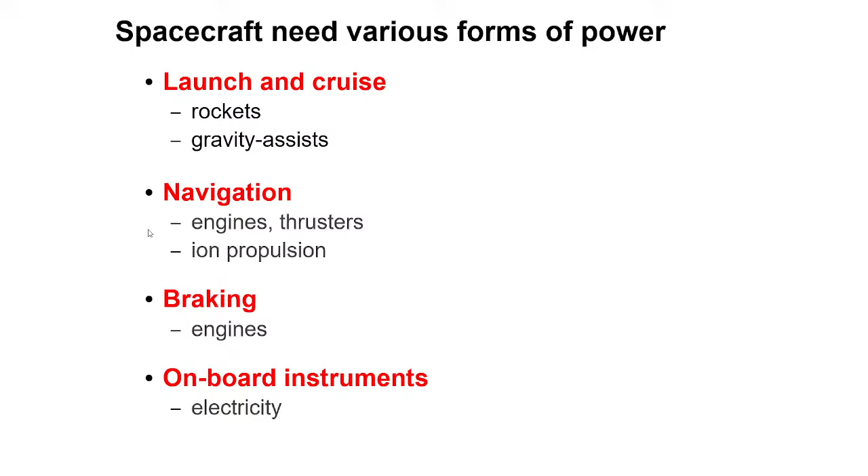The planet then pulls it along, but it doesn't capture it into orbit. It's like a slingshot. It goes past it, this planet slows down a little bit, but the satellite speeds up much faster. So it does this a few times. It flew by Earth once, then flew by Venus again. Each time it gains a little bit of velocity, each time it goes past the planet.

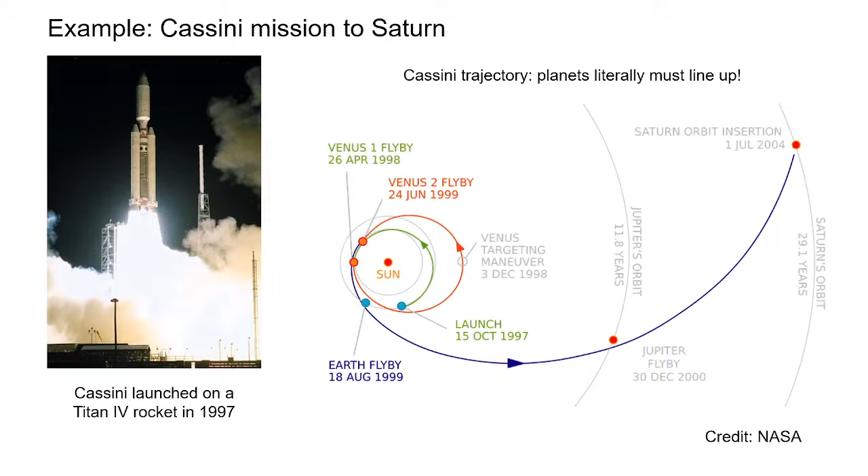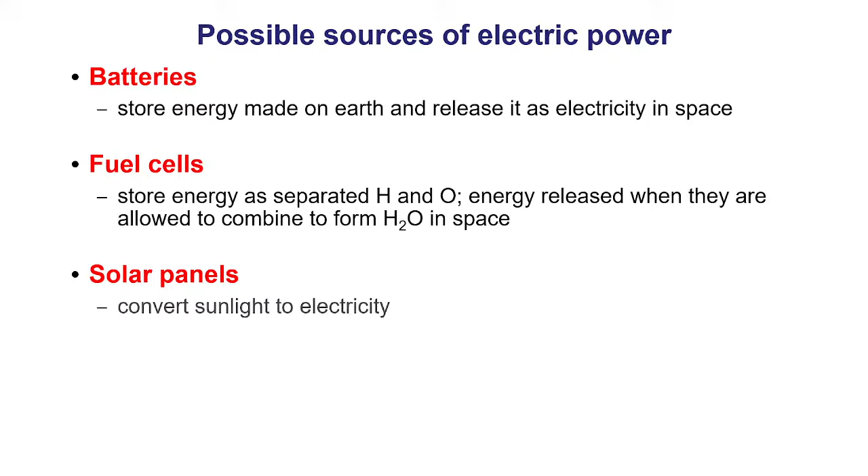The advantage of this is there are no moving parts. There's no turbine, there are no mechanical gears, nothing, just thermoelectric conversion. And we know the half-life of plutonium is about 87, 88 years. So we know exactly how the power is going to decay. The physicists can calculate what the power requirement is going to be 80, 90 years in the future and how much power we'll need. So it's a very reliable source, and this is what I'll talk about.

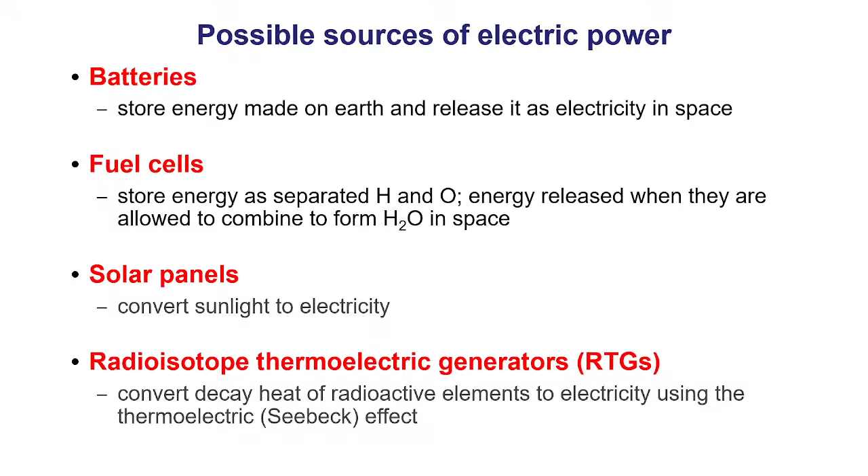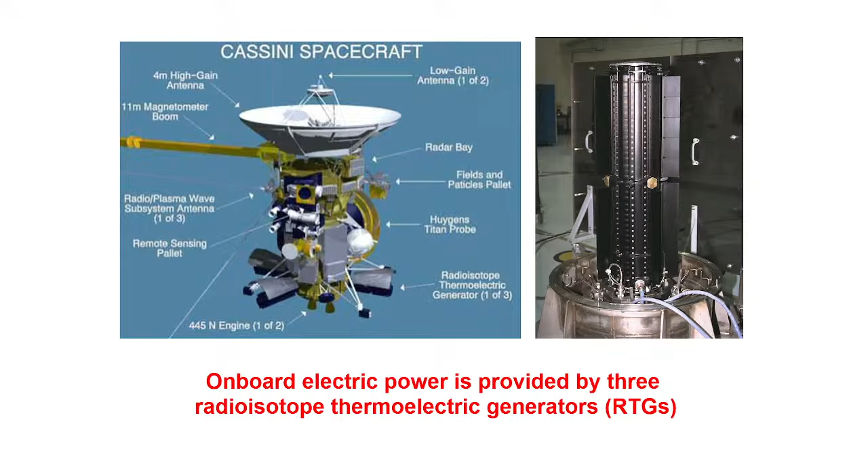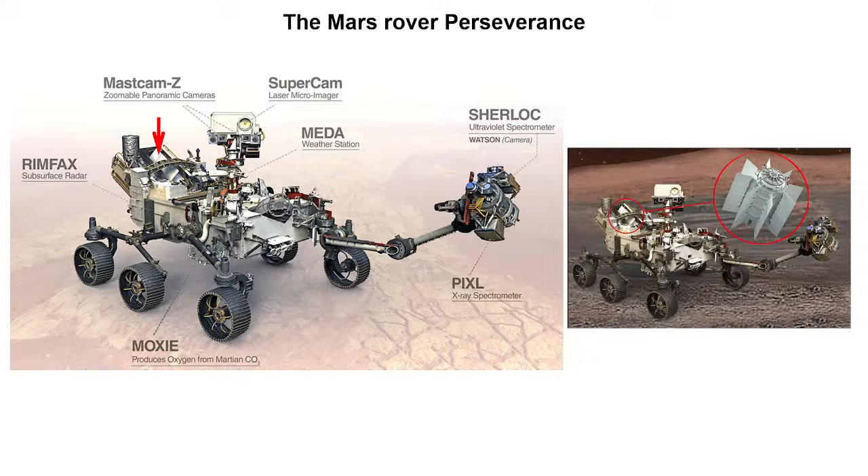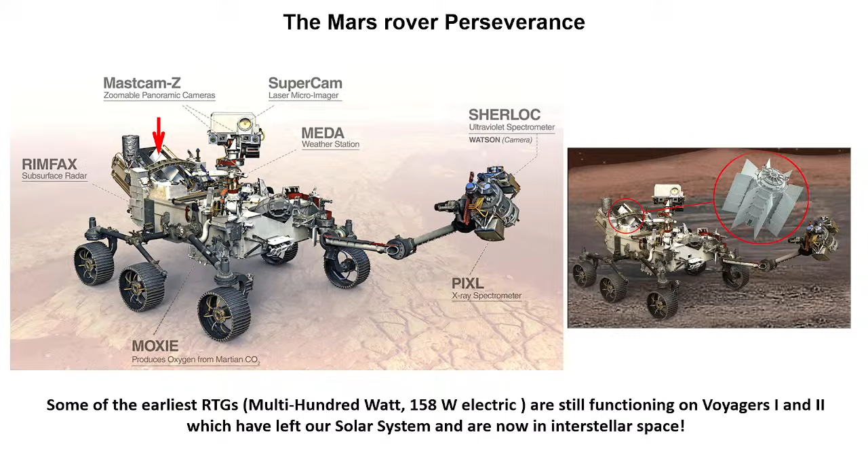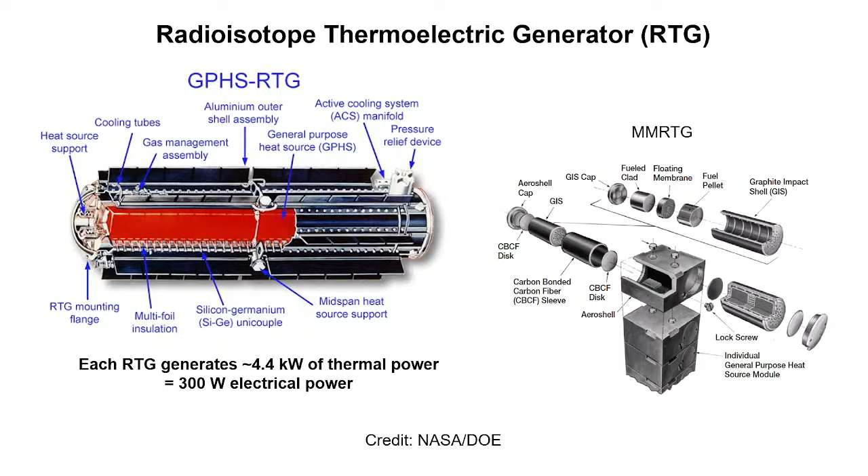This is what one unit looks like. This is the plutonium oxide fuel pellet, which at steady state is sitting around 1300, 1350 degrees Celsius. And these are the two cups that are made with iridium metal.

And when you put all this thing together, then this is what each pellet looks like. And the reason you need iridium is if there's an accident during launch, you want to protect the plutonium. You don't want the plutonium to spread out all over wherever the nearest launch site is. And so it's a protective mechanism.

The engineering design is actually pretty complicated, because as the plutonium decays, it generates helium as a decay product, and this helium has to then be allowed out of the pellet. It cannot be hermetically sealed, because otherwise, eventually, the gas pressure would make the pellet explode.

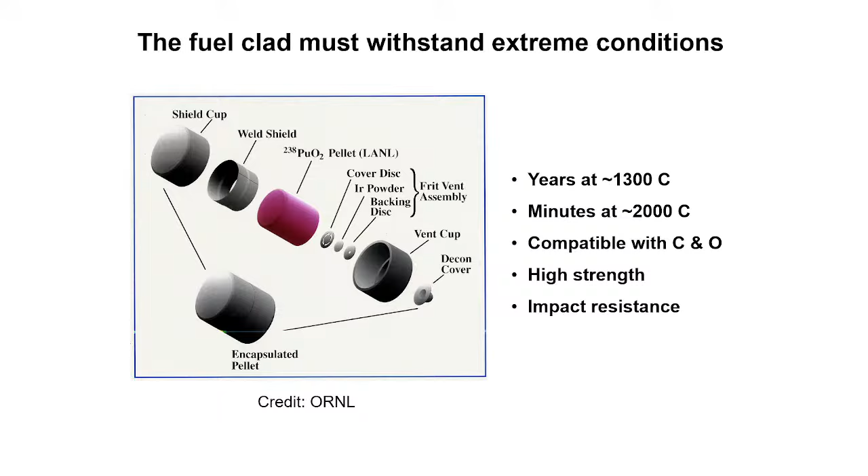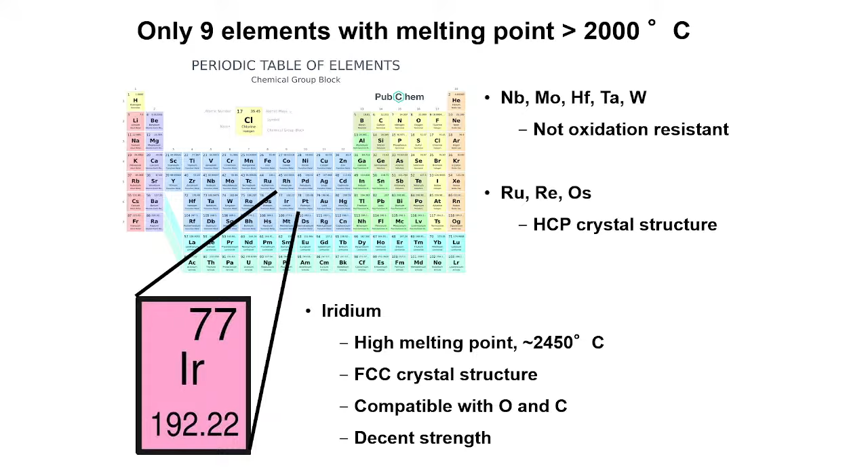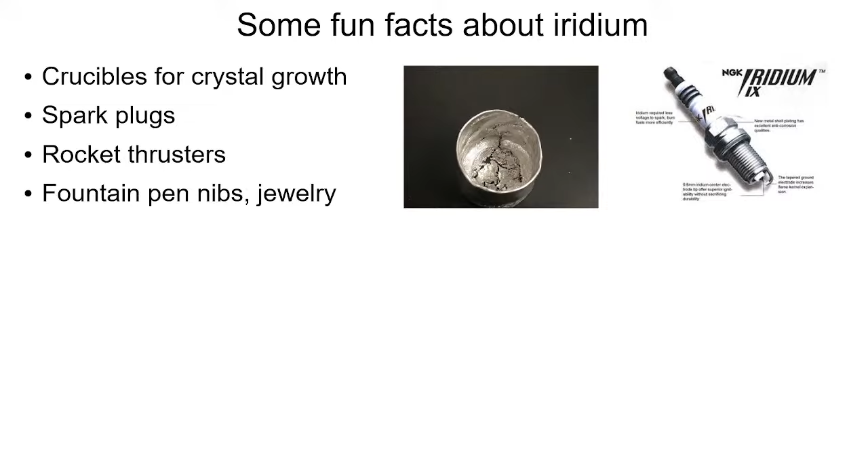They're used in rocket thrusters. If you're rich, you can buy fountain pens that have nibs with iridium, and of course, some people like to use iridium for jewelry. The earliest satellite phone was made by Motorola, and it was called the Iridium satellite phone.

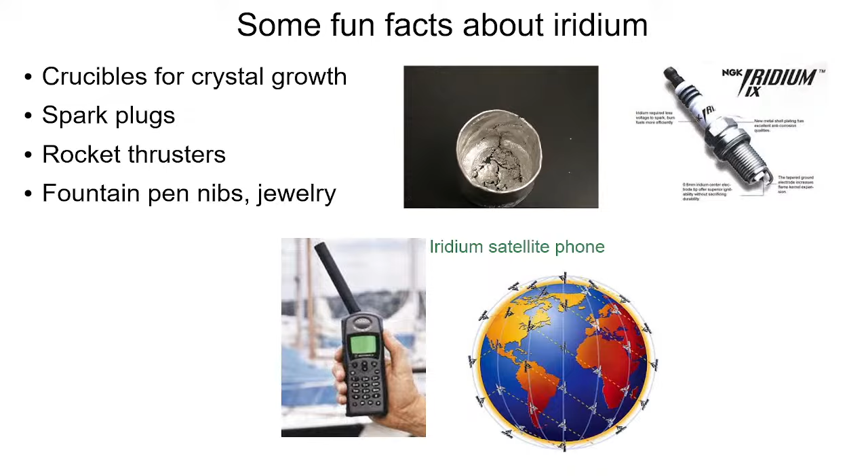Any guesses on why it was called the Iridium satellite phone? It was not made with iridium, by the way. The atomic number for iridium is 77, and initially their plans called for 77 low Earth satellites in orbit around the Earth to cover the Earth. But then there were budget cuts, and the number of satellites dropped to 66. Then you look up the periodic table, and the element is dysprosium, which doesn't sound as exciting as iridium, and sounds like something you might take for a stomach upset. So they still call it the Iridium program.

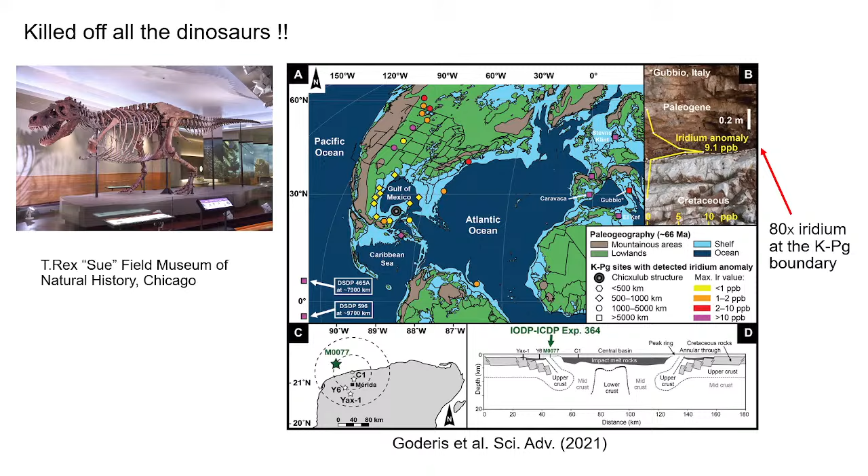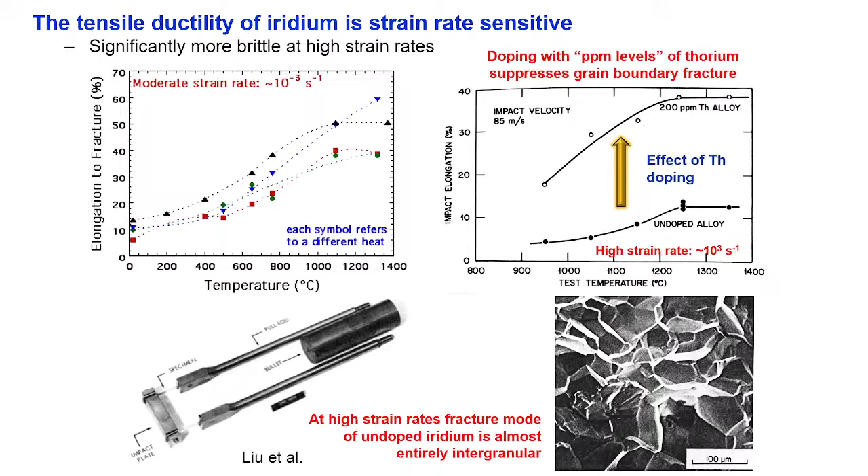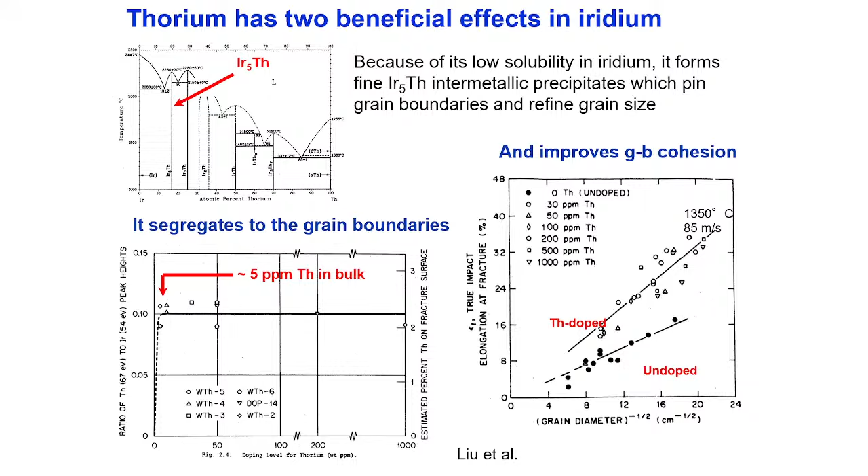As I said, it suppresses the grain boundary fracture. So down here you have mostly grain boundary fracture, and as you go through this ductile brittle transition, it transforms from mostly grain boundary to mostly cleavage transgranular fracture. So suppression of this grain boundary fracture is the reason why you get this thorium effect.

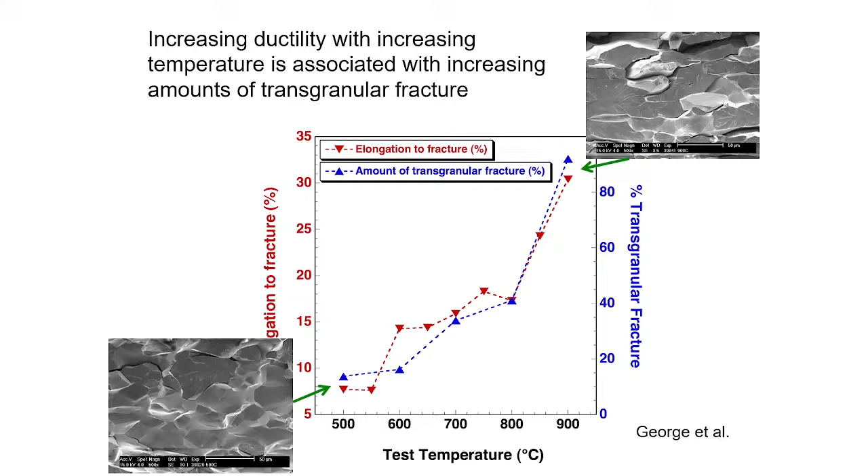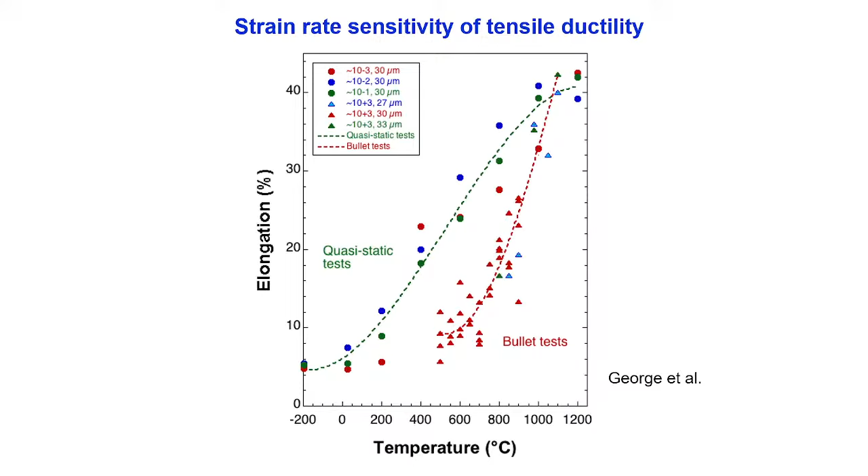But in addition to that, you have these thermal barrier coatings that you put on the superalloy. This is a ceramic which acts as an insulator, and so that improves the temperature capability. And then over time, they also had active cooling in the blades, so that you could blow air through the holes in the blade, and that will cool the blades further.

So with the combination of thermal barrier coatings and film cooling from active cooling, you now have temperatures where the inlet temperature of the gas coming out of the combustion chamber, hitting the first high pressure turbine blades, is above the melting point of the metal. So it's quite dramatic what the improvements have been.

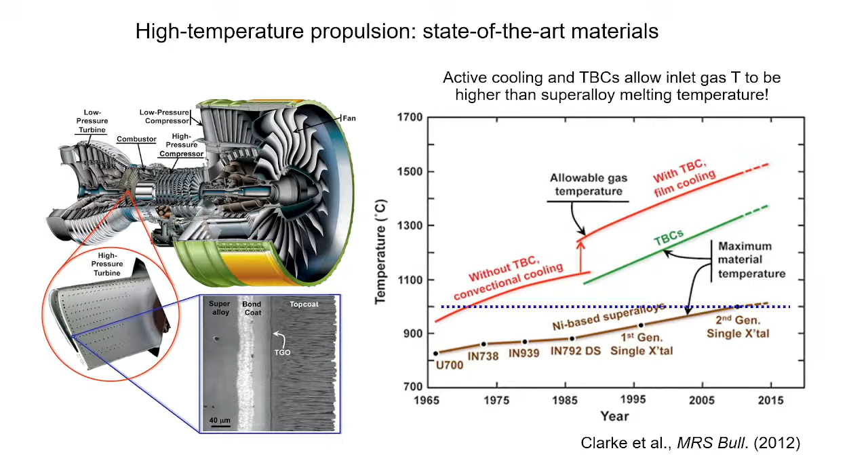But you can see that most of these alloys, as they've developed, always approach this plateau-like behavior. The current alloys are similar to what's called a CMSX4 alloy, a single crystal alloy that GE uses. It has an operating temperature around 1100 C, give or take.

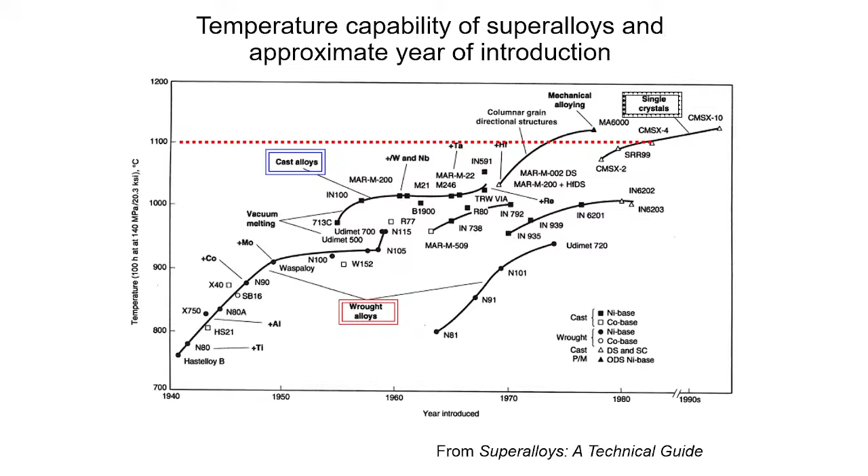It was originally patented by Cannon-Muskegon, but several engine manufacturers use it. The reason this alloy is so effective at high temperatures is it's actually a composite structure, a two-phase structure.

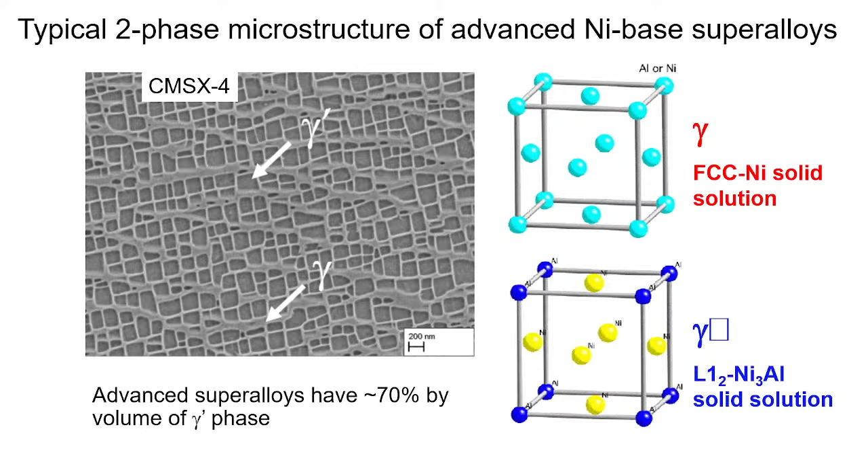If you look at a blacksmith making tools in the old days, they would take a piece of steel, put it into fire, it gets red hot, you take it out and you beat it. The reason is because most metals get softer as you heat them up.

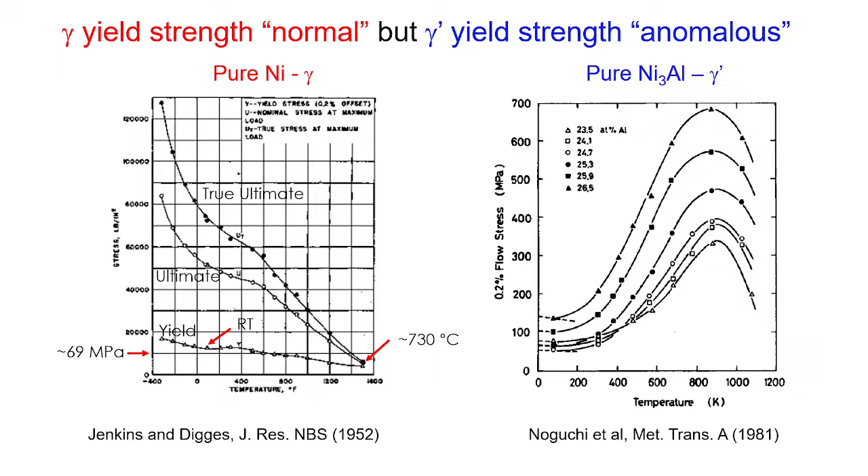So several years ago, we started looking to see whether there were other systems—not the high temperature nickel system, but iron-based systems used at lower temperatures—that might show the same effect. Surprisingly, some systems show this, but the mechanism is different. In the nickel-aluminum case, the temperature dependence is because of dislocations cross-slipping and getting caught up during the cross-slip process.

Now you might think, why didn't people try getting rid of the quenched-in vacancies? It turns out it's not so easy to get rid of them in FeAl. That's because, unlike most materials where the migration enthalpy of vacancies is low but the formation enthalpy is high—meaning it's hard to form vacancies but easy to move them.

In FeAl it's exactly the opposite—it's very easy to form vacancies but very hard to get rid of them. So you have to anneal it for weeks on end at very low temperature to remove the vacancies frozen in from high temperatures. But when you do that, you get this anomalous behavior.

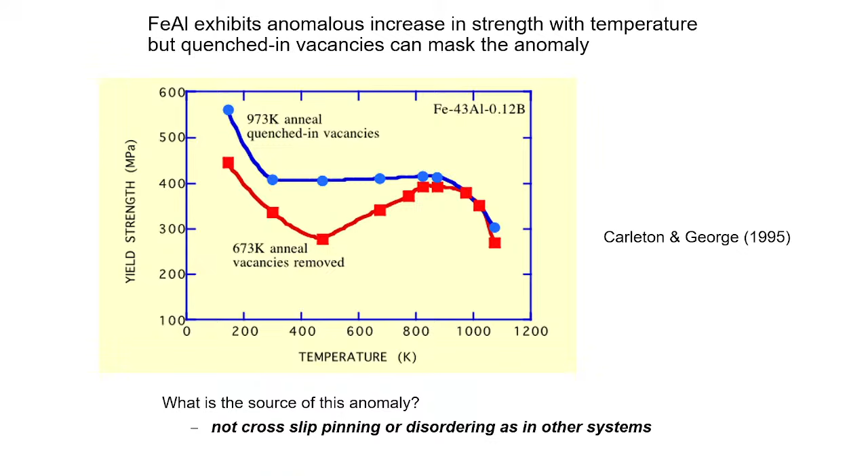And the way we showed it is by doing path-dependent experiments. So if you want to test at a given peak temperature, you could approach that from the high temperature side, or you could approach it from the low temperature side.

If you approach it from the high temperature side, you've already quenched in the high vacancy concentration set at the high temperature. But if you were able to rapidly heat from room temperature up to this point, and the heating rate is fast enough, then you maintain the low vacancy concentration. And that's indeed what we saw. When you upquench very fast, you get very low yield strength. You upquench, then hold for a little bit longer, the yield strength goes up, hold a bit longer, and the vacancies become representative of where you quenched it from, and so on.

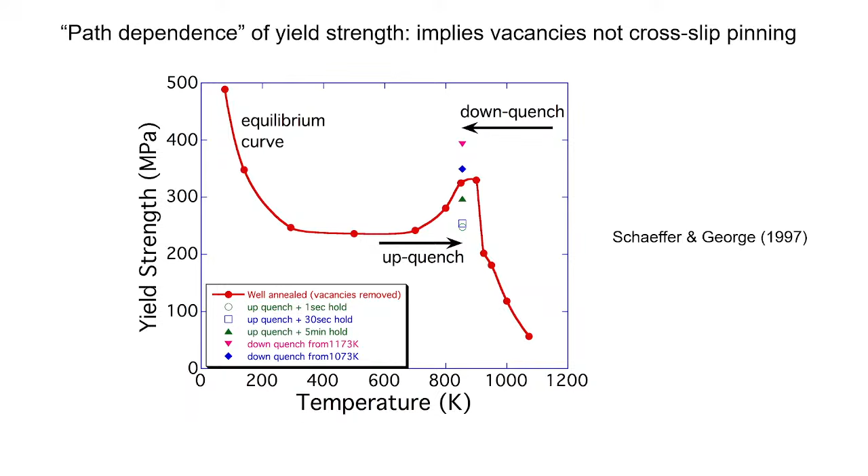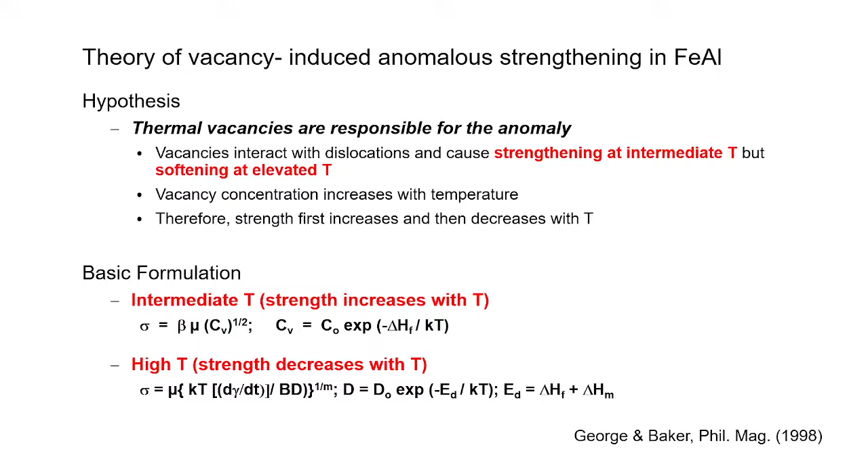I won't go into all the details, but you can use simple expressions for hardening due to vacancies using a Fleischer type model, where vacancy concentration to the 1/2 power times some constant times shear modulus gives the yield strength, and the vacancy concentration depends on the formation energy of the vacancies. The high temperature strength is described by a creep equation, which I won't detail, but it depends on both the migration and formation energy, whereas this only depends on the formation energy.

So these are the creep equations. Of course, this part is not strain rate sensitive, but this part is strain rate sensitive. The faster the strain rate, the more the curve shifts to the right. You can easily see and imagine that. So if you draw a curve at different strain rates, the peak temperature will shift to the right, and that's in fact what we see—the peak temperature shifts to higher values as you increase the strain rate.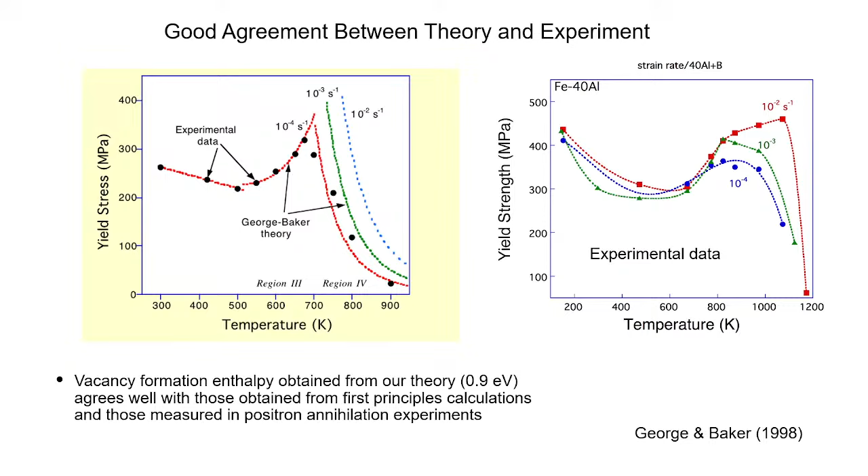Now I want to talk a little bit about another interesting phenomenon, which is that smaller is stronger. This was a very popular topic a few years ago. In most materials, we know that if you take a chair and want to make it stronger, you make the legs bigger. If you make the legs thin and spindly, it'll get weaker.

But Mike Uchic and Dennis Dimiduk, who were at the Air Force Research Labs at the time, showed that if you make pillars of different sizes—fabricated by nano-fibbing out of a large single crystal, made out of nickel—and then deform them using a flat-top nano indenter, not a conical or Berkovich indenter but one with a flat top machined on it, pushing down on it, the pillar behaves like a single crystal. You get very nice, initially single slip, depending on the orientation of the pillar.

They plotted this as a function of pillar diameter, from 1 micron to 30 micron diameter. What you find is that at about 30 micron pillar diameter, the flow stress behaves similarly to the bulk flow stress of nickel—if you took a bulk sample millimeters in size and plotted the engineering stress-strain curve, it would look like this. But when you go down to 1 micron diameter, the strength increases dramatically. So the smaller pillars were dramatically stronger than the bigger pillars.

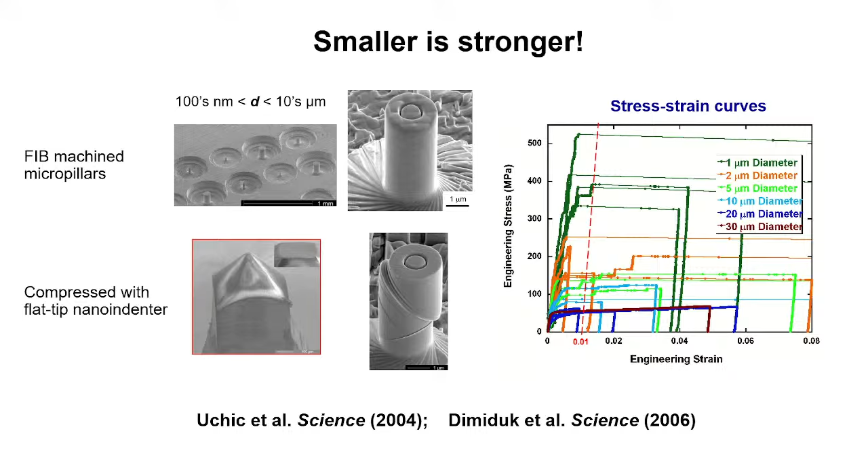Here's a simple picture of what you might expect. Imagine that you have dislocations in a very ordered array, just for simplicity, as a cartoon. So you have two length scales: one is the spacing between the dislocations, and one is your pillar size.

If your pillar is so small that it entirely falls between these dislocations, there'll be no dislocations inside the pillar. Or you could go to very large pillars, in which case you have lots and lots of dislocations, and on average you'd behave like bulk. Here you'd behave like ideal single crystals, like Brenner's classic paper.

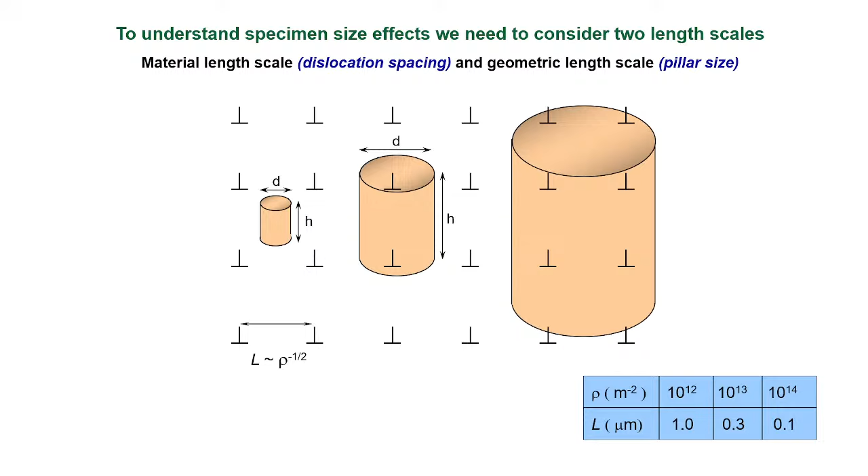And if you're in between, then all the statistics of dislocations and the activation energy, the stresses needed to activate dislocation, all come into play. So you get a distribution of sizes in this range—one strength here, which is sort of deterministic, and here it would be statistical, probabilistic.

So to put this in cartoon format: if I plotted yield strength versus specimen size, at very low specimen sizes you'd get strengths close to the ideal, which is G over 5 to G over 30, the theoretical strength. At very large pillar sizes, you get bulk strengths, G over 1000 to G over 100. And there'll be some transition between the two, which we don't quite know, but let's imagine it looks like this.

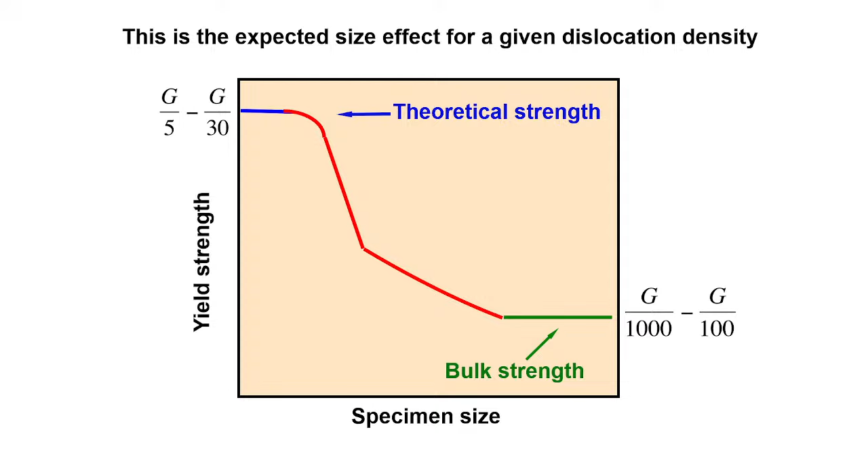Just as luck would have it, around that time I was working on directionally solidified eutectics. One system we looked at was nickel aluminum with moly fibers—molybdenum fibers in a nickel aluminum matrix—and we directionally solidified them in an optical floating zone furnace. By changing the growth rate, when you grow them faster, the pillars get smaller and more closely spaced; grow them slower, and they get bigger.

The nice thing about this system was that NiAl reacts only to acids and molybdenum only reacts to bases, so you can selectively etch the matrix from the fiber. When you etch it, you end up leaving behind perfectly pristine molybdenum fibers or pillars. And because there's no FIB damage involved, in principle you should have pillars with no dislocations in them.

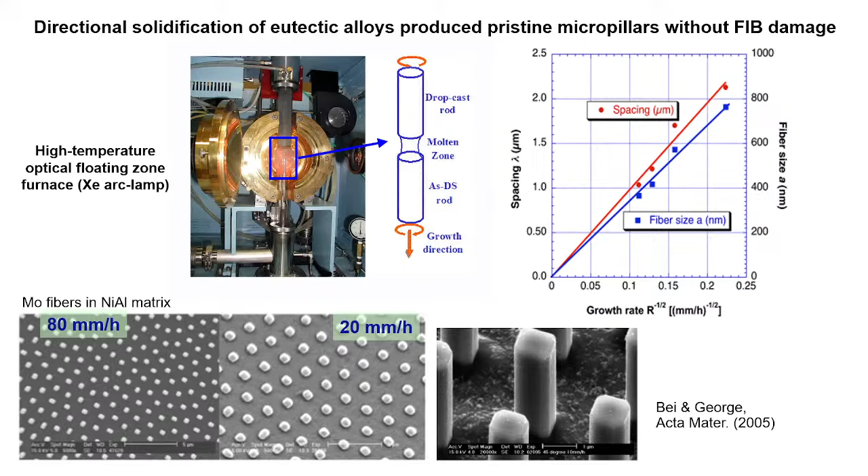So we tested them just like Uchic did, and here's what we find. The stress-strain curves—this is load versus displacement—show small pillars look like this, intermediate ones look like this, all the way from 360 nanometers to about one micron.

If you look at the loads, they look like the smaller ones are getting stronger, but it's not the load that's important, it's the stress. When you divide by the cross-sectional area, these stresses are almost identical—there is no smaller-is-stronger effect. They all yield at close to the theoretical strength, about 9 GPa, give or take, across pillars from small to large.

So that sort of solved one of the puzzles of the Uchic and Dimiduk data. Smaller really is not stronger—what they were seeing was the effect of defects in their pillars.

So now we could take these pillars and extract them completely from the matrix. You dissolve the matrix away completely, and you're left with these very long fibers. With the help of people in Germany, we were able to test them in tension, not just compression in the nanoindenter, but in tension. So this is what it looks like—you can pull on these fibers, and we saw something very interesting.

If you look at the compression pillars, the data are scattered, but not very badly—they're all about 9 GPa plus or minus a tenth of a GPa or so. But the tensile yield strengths are scattered quite a bit. They go all the way from what you'd expect bulk behavior to look like, to what a perfect crystal would behave like.

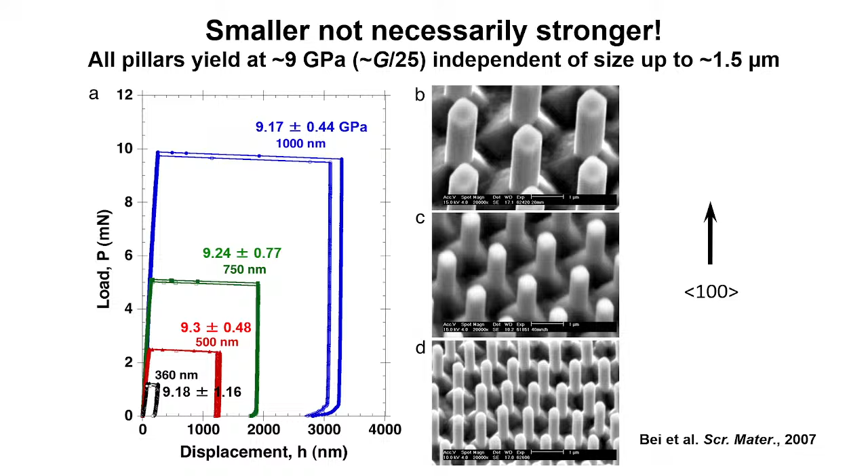The reason is because the size of this pillar is different from the size of this fiber. This fiber is quite a bit longer, so the probability of finding a pre-existing defect is much greater than in the pillar. That's what Sudarshan Phani and his colleague showed. If you look at lots of fibers and do TEM on them, you find that in many areas they're completely defect-free, but every once in a while you come across little bundles of dislocations.

So when you grow this as a single crystal, it's not a perfect single crystal—every once in a while there'll be defects in there. Phani was able to painfully measure the average spacing between this group of dislocations and another, and the average spacing was about 37 microns, roughly 1 over the dislocation density. Then he developed a very simple 1D model for the tensile test, which I think is very clever.

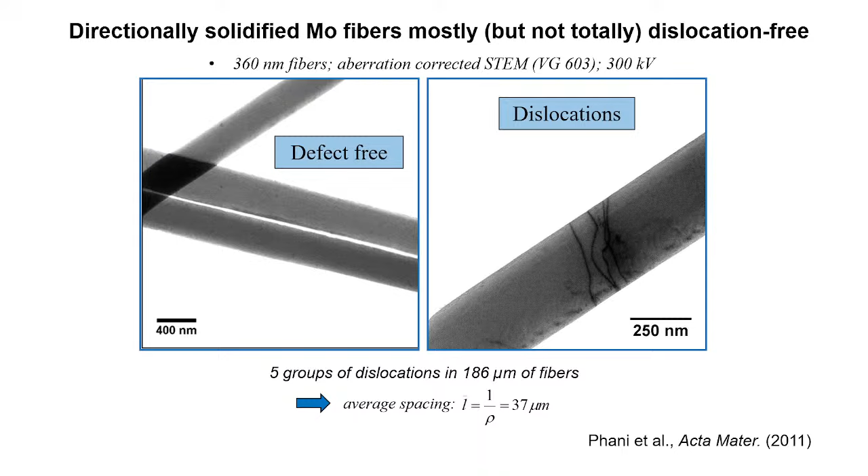There are again two length scales in the problem: one is the size of the pillar you cut out, and the other is the average spacing between dislocations, which is 37 microns as we measured. If you cut a pillar from a defect-free region, you should get the theoretical strength. If you cut a pillar including a dislocation, you should get the bulk strength—this simplistic picture assumes the bulk strength equals the critical resolved shear stress needed to move that dislocation.

So you'd go from here to here, depending on the case. If you do a Monte Carlo simulation of uniformly spaced dislocations, running many simulations, you could do a weighted average: the bulk strength multiplied by the ratio L over L-bar. When L is large compared to L-bar—meaning the specimen length is large compared to L-bar—this term dominates, sigma bulk dominates, and you get bulk-like behavior. In the other case, the other term dominates and you get behavior like the theoretical strength. This equation is simply that relationship.

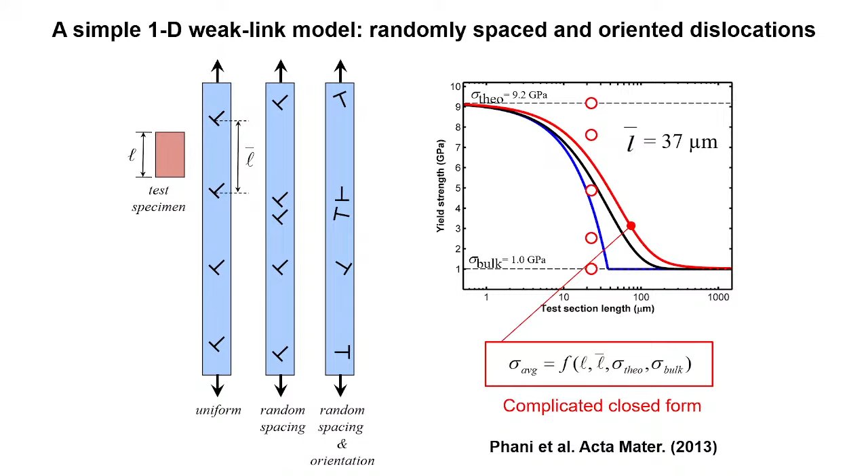If you now do this Monte Carlo simulation for these different cases—again these are Phani's results—when the size of the specimen is small, if you run 30 simulations, they all land right on top of each other. If you're at very large specimen sizes, they also all line up on top of each other. Somewhere in between, you get this distribution. What's interesting is that once you cross into this boundary, the data points aren't uniformly distributed—the closer you are to the upper bound, the more data points cluster there, and the closer you are to the lower bound, the more they cluster there instead.

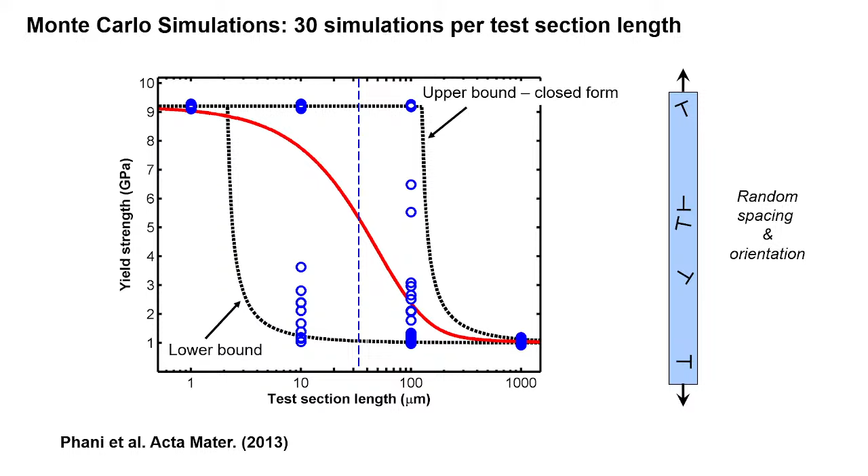So in addition to these two other length scales, where you change the size of the specimen making them smaller or larger, you can also change the spacing between dislocations. This is well annealed crystal, this is crystal with some cold work in it, and this has a lot of cold work in it. As you take the same specimen size, you would sample more and more dislocations as you had more and more defects in them. This is what you would expect: when you go from theoretical to bulk, with increasing dislocation density, you would expect that curve to shift to the left.

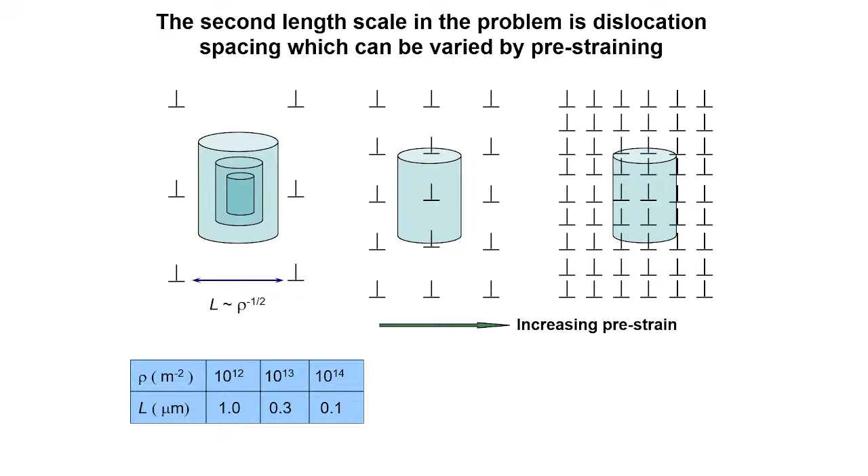And that's in fact what we see. So we took material that was initially grown, and then gave it cold work of different amounts. When you have 0% pre-strain as grown, all the data fall very close to each other, theoretical strength about 10 GPa. When you have 11% pre-strain, you have so many dislocations that the material behaves like bulk - again, no scatter here, no scatter there. And then in between, at 4% and 8% strain, you get scatter, which means you get probabilistic behavior when the specimen length scales approach the defect length scales, and at the two extremes, you have more deterministic behavior.

So this is what it looks like when you compare the tension and compression data. They all behave kind of similarly.

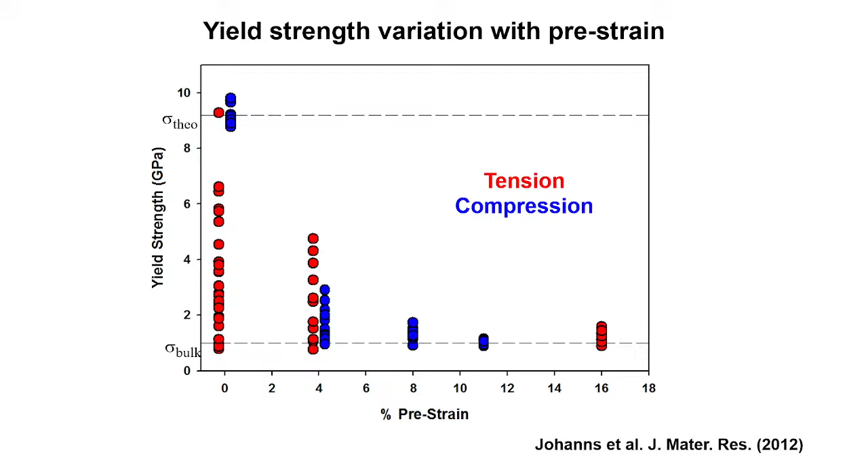So if I have a few more minutes - okay, I'm running late, but let me quickly jump forward. Since somebody mentioned they're interested in high entropy alloys, the term was coined in 2004. Since then, it's really taken off. This is not the most recent data, but you can see the number of papers and citations have both increased dramatically. In recent years it's even higher, but I haven't got the latest data.

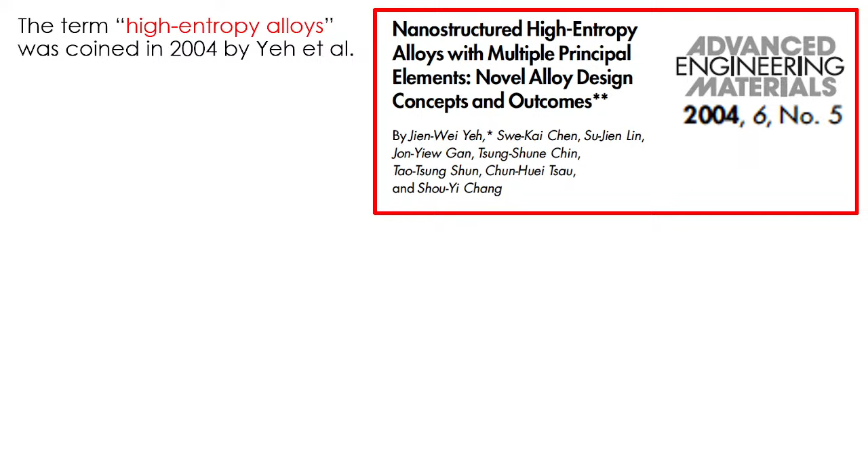Just to put things in perspective, in a conventional alloy you have a primary solvent. If you have an aluminum alloy, aluminum is the solvent, and then you add secondary elements like silicon. They occupy the corners of the phase diagram - this is the ternary phase diagram. Conventional alloys are in this corner. High entropy alloys are kind of in the middle of the phase diagram - there's no solvent or solute in the conventional sense, but multiple principal elements, and there's a vastly greater number of these alloys, in the tens of millions rather than a few thousand in the corners, by the nature of the combinations you can get.

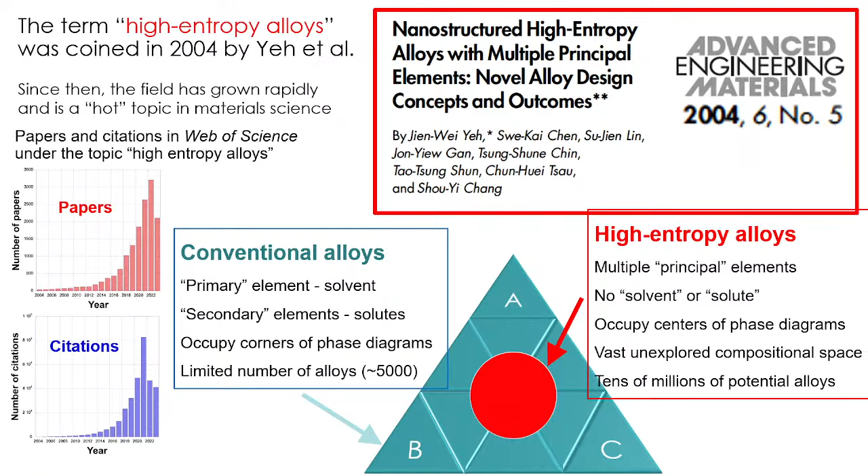So a lot of this is unexplored, and there are many claims, some might say hype, about high entropy alloys. The first is that configurational entropy stabilizes solid solution - this was the founding hypothesis of the field, Yeh's original paper. Some people think you have entropy-driven sluggish diffusion because of the rugged potential energy landscape. Some have claimed the higher the entropy, the higher the strength by solid solution strengthening. Most recently, short-range order has become the hot topic - there's dozens of papers on short-range order and how it enhances strength and affects deformation behavior. And finally, some refractory HEAs have the potential to go beyond nickel-based superalloys, and so on and so forth.

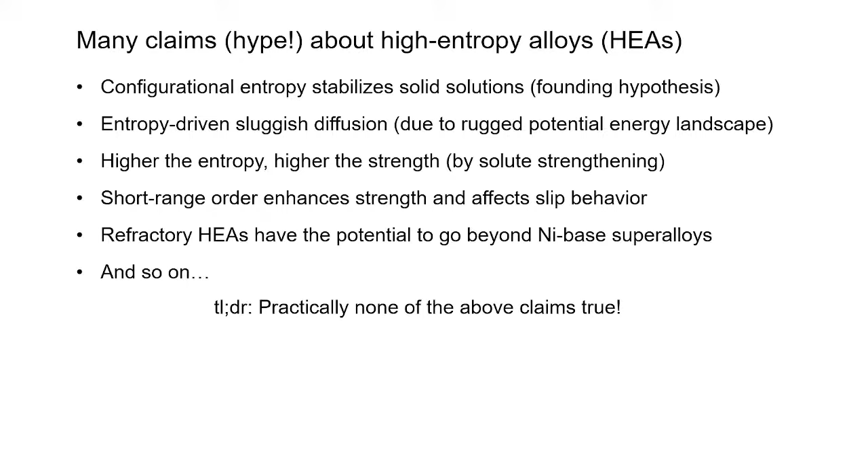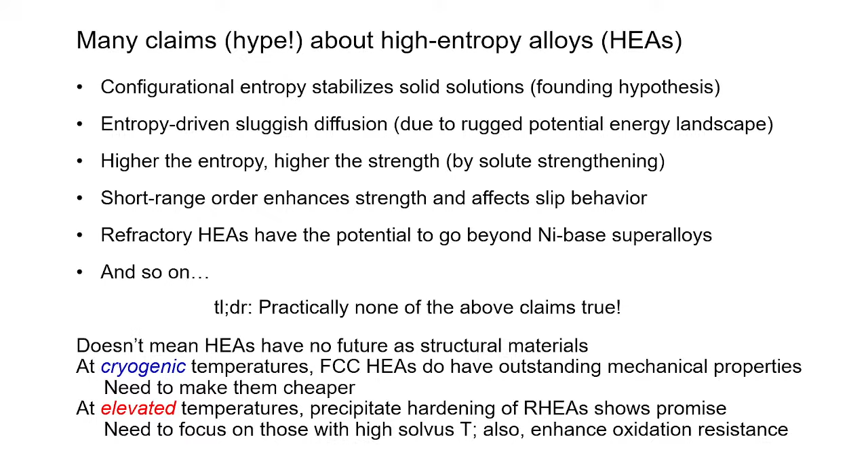And the short answer to all of this is that practically none of the above claims are true. I'll show just a few examples. But I want to add a word of caution: it doesn't mean HEAs have no future as structural materials. At cryogenic temperatures, they have outstanding, exceptional properties. At elevated temperatures, there's some work to be done - we need to beat superalloys, which are really miracle materials, and we need a lot more work before we can have materials that can beat superalloys.

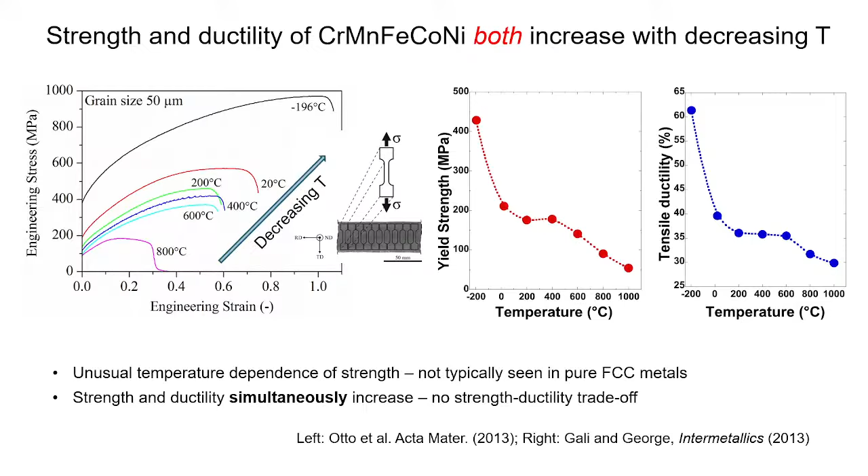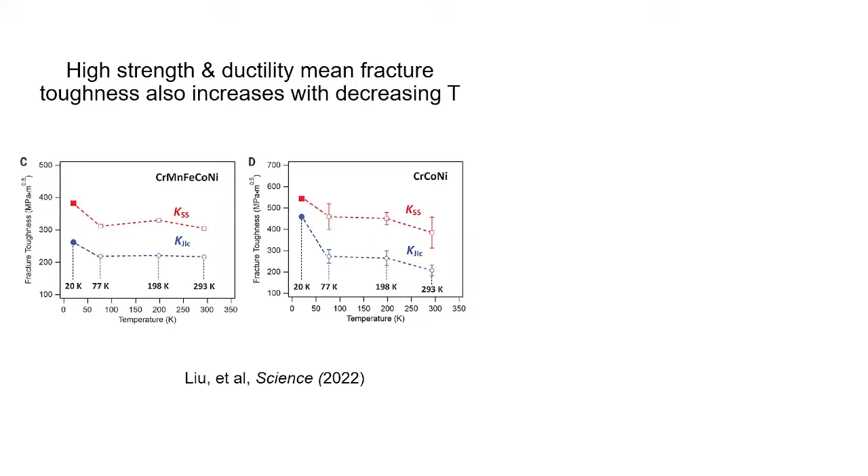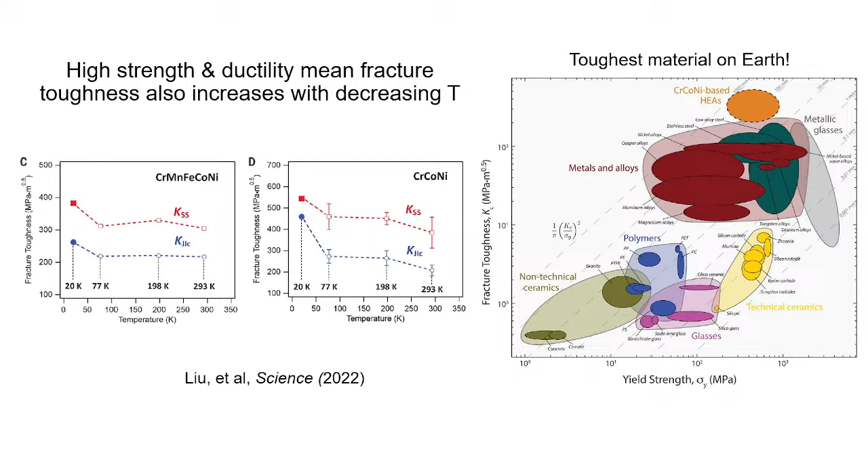And then if you plot an Ashby plot of fracture toughness versus yield strength, these high entropy alloys are the toughest materials on Earth. You can compare to any other system that people have tested, and they're by far the toughest, approaching 500 MPa square root meter.

So the question then is, at cryogenic temperatures, there's no doubt that one can get exceptional properties. The question is, at high temperatures, can we get exceptional properties? And the answer is a qualified maybe.

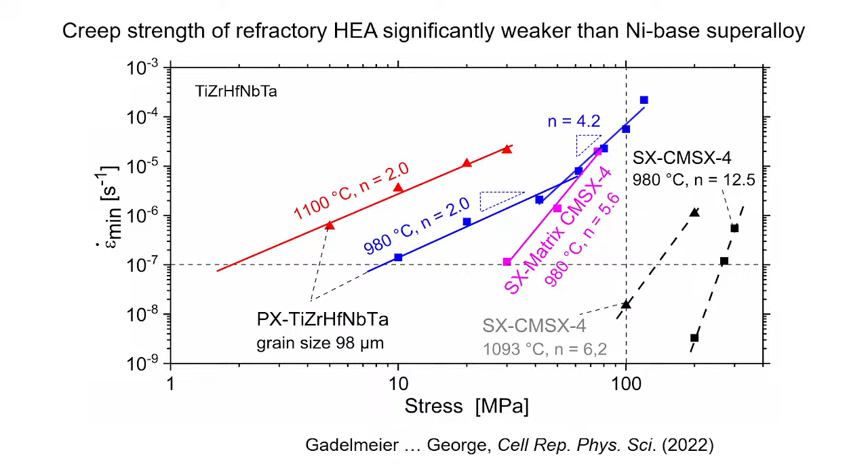So this is not so surprising because this is a two-phased mixture. But even the matrix is weaker, and that's because this is FCC, this is BCC, and diffusion is much faster in the BCC.

So to summarize, for cryogenic applications below 100 K, the opportunities are that they have outstanding mechanical properties. The challenge is we need cheaper alternatives, so iron-based alloys, because elements like cobalt and nickel are very expensive, and it's hard to get industry interested in these alloys. Intermediate to high temperature applications are for power generation and transportation.

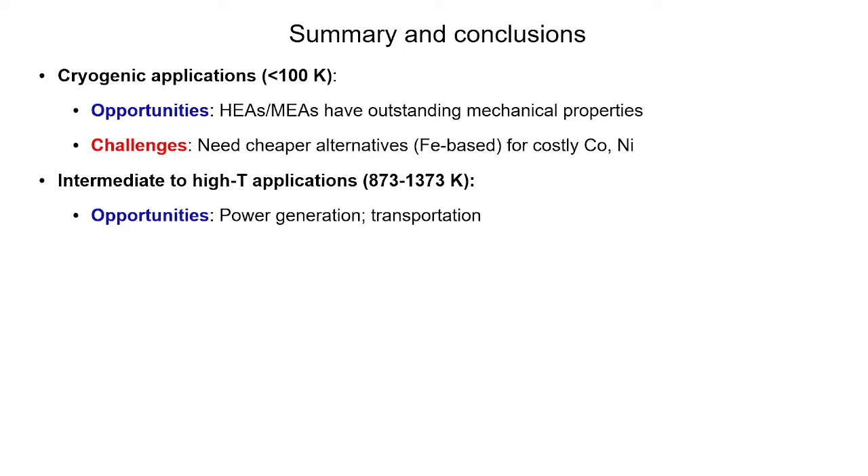The problem is that the melting points of FCC HEAs are similar to superalloys. So given that superalloys are very well established and there's a lot of data available on them, it's going to be a hard sell to come up with anything attractive in that temperature range.

For ultra high temperatures, above 1500 Kelvin, there are also opportunities in hypersonics, rockets, engines, space, and power. The challenges are that BCC HEAs are weak in creep, so we need precipitation hardening, and there's a lot more additional work that needs to go into these HEAs.

And then the iridium that I talked about, I sort of skipped over the fact that the thorium that is added, the few ppm thorium added to the iridium, is radioactive. So there's a lot of interest in finding alternatives for thorium, and we've developed some alternatives for that. But until and unless the use of radioactive thorium becomes environmentally a big problem for us, we will continue to use this, but we've got a new alloy already ready to go in case that's a problem.

So with that, let me stop, and I'm happy to take questions. Thank you.

So, a few questions, if you have any in mind? So, if you understand... No?

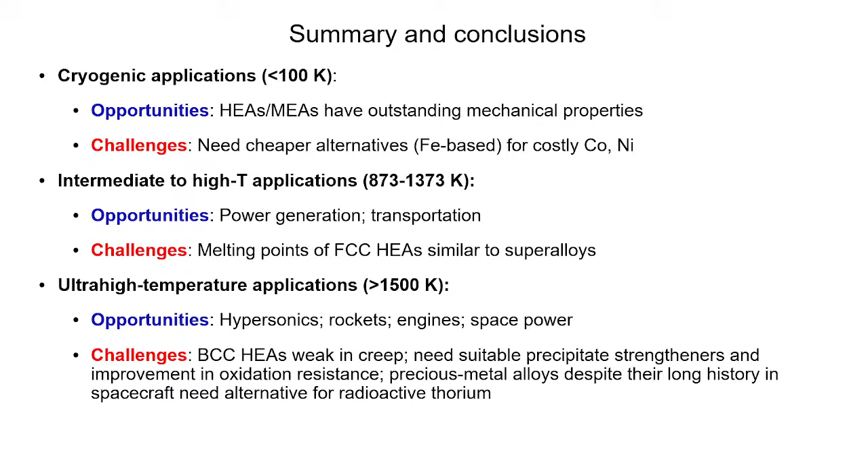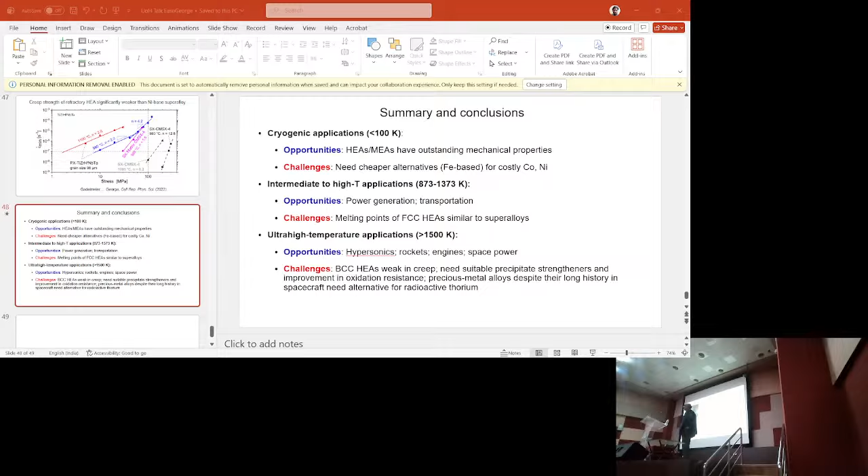Yeah, so at Oak Ridge we work with NASA on material for space power. The reason is because anything to do with atomic energy is handled by the Department of Energy, and we are a Department of Energy lab at Oak Ridge. The naval nuclear program is handled either by the defense labs or by the Navy nuclear labs, and they are completely behind the fence, and they cannot talk about any of that. So I don't know anything, I'm sorry.

But since these are civilian missions, you can find a lot of that information on NASA's open web page. So we work on things that are publishable, open web. A lot of the other stuff is behind the fence. Okay, yep.